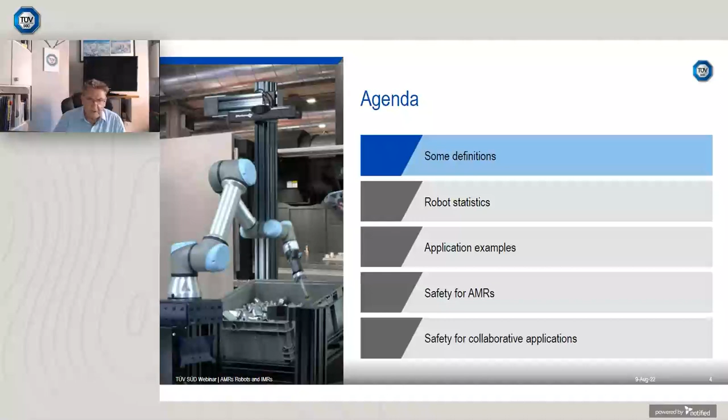So some definitions. An industrial robot, and we're talking about robots that are used in industry - our main topics today are all about robots used in industry. We're not talking particularly about medical robots, service robots, and so on. So an industrial robot is quite simply a reprogrammable multi-purpose manipulator that has three or more axes. And they come in all sorts of different shapes and sizes, and are used in a huge variety of applications. So it's difficult to be too specific about the whole variety of applications we have. But what is of growing importance and growing relevance is the use of robots in a collaborative application.

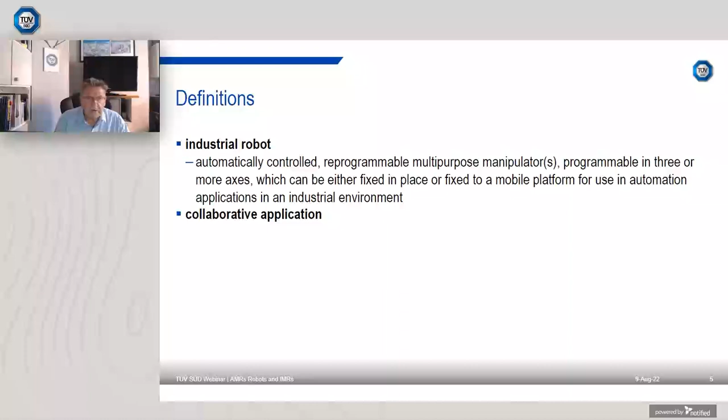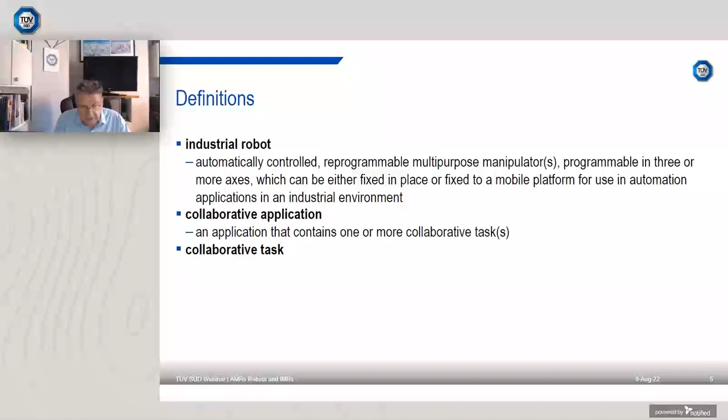So a collaborative application is defined as an application that contains one or more collaborative tasks. So a blindingly obvious definition, I guess. So the key to it is a collaborative task. And a collaborative task is a task that involves the use of a robot, but a task where a robot and an operator are within the same safeguarded space. So working without physical separation between the robot and people.

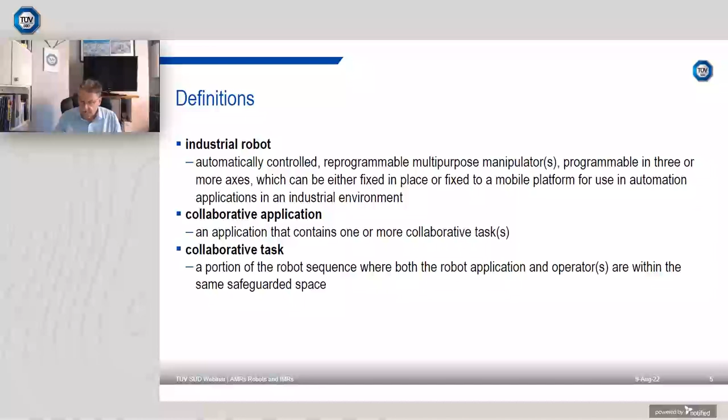Traditionally, of course, industrial robots have been used where they would be enclosed in physical guarding, very often called robot cells. The robots would be only accessible by people entering the danger zone, the zone where the robots are, by monitored movable guards or some other measures like that. Collaborative applications are where we're going to acknowledge that there will be people and robots in the same zone, so they could come in contact with each other. So that's the important thing.

AGVs and AMRs and IMRs - the terms are used slightly differently in some cases. We shall look a little later at a North American standard that has tried to put some fairly precise definitions on the use of these abbreviated terms. But in essence, an AGV is an automated guided vehicle that follows fixed routes. So they would typically be following a route mapped out and using inductive guides embedded in the floor or something of that nature. So they could work only along the tracks that they've been assigned to. And there is a place for those, of course. They've been used very successfully for many years, and there's still applications which suit that kind of approach.

But what we are seeing more and more, because of the increasing use of more advanced technologies, is mobile platforms, mobile vehicles that don't have to follow a fixed path, that can navigate by the use of various sensors and various technologies, so they can move around dynamically. In some cases, particularly if it's an outdoor application, they'll be using GPS systems or this kind of thing to map their routes, but they're working autonomously. So those kind of platforms are more likely to be described as an AMR, an autonomous mobile robot. And safety has to be assured, of course, so we'll look particularly about what sort of technologies are used to ensure that the AMRs can be deployed safely.

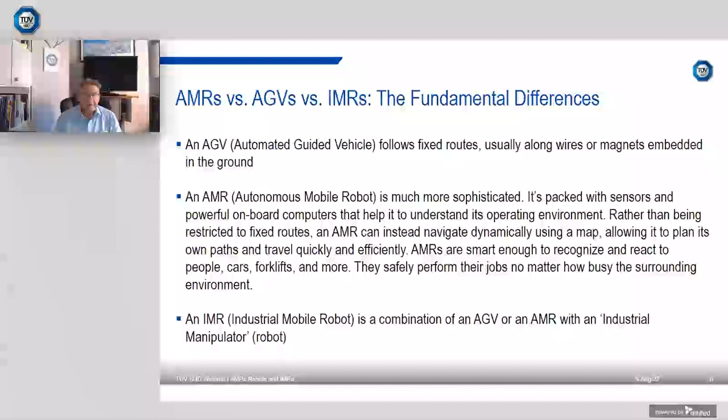Robots have been around now for a very, very long time, 50 years or more, since the first robots that could truly have been described as industrial robots were used, primarily in the automotive sector, but their growth has been relatively consistent.

In the early years, the use grew quite rapidly until there was an incident in a painting application in an automotive manufacturing plant in Dearborn in the USA, where the robots decided to go a little bit crazy, if I could use that expression. Some windows got broken, some physical damage was done because of this random operation, and it set back the deployment of industrial robots for a few years.

But then the technologies, the control technologies, improved. The chances of those sort of things happening again were lessened, of course. So they've started to be in wider and wider use.

This slide on the screen now is from a report from the International Federation of Robotics, and they produce a report that looks at the deployment of robots throughout the world. We can see that from the years 2009 up to 2018, there was steady growth.

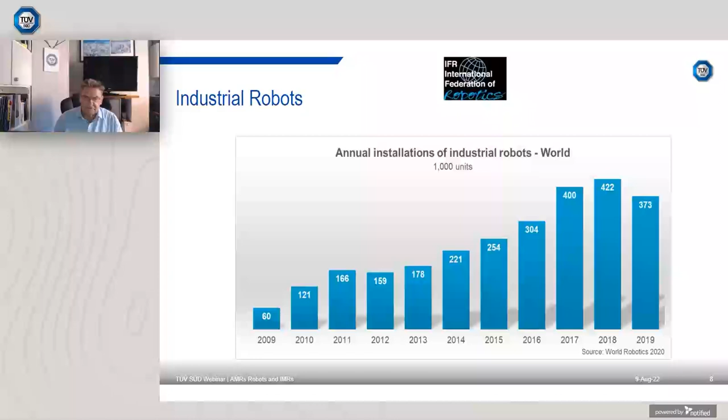It was knocked back, of course, because of the pandemic, which knocked everything back. So 2019 saw a drop in the annual installations, but we see that there was clear and steady growth for the years before that, and that growth is expected to return.

This graph shows us the percentage of installations according to the three key regions: Asia and Australia combined, Europe, and America. I'm not sure how much Australia counts for in the blue bars on this graph, but I suspect it's a relatively minimal amount. So I think what this shows us beyond any doubt is that the key growth areas are in the Asian market, where we're seeing the greater density of robot installations and the greater take-up of various technologies.

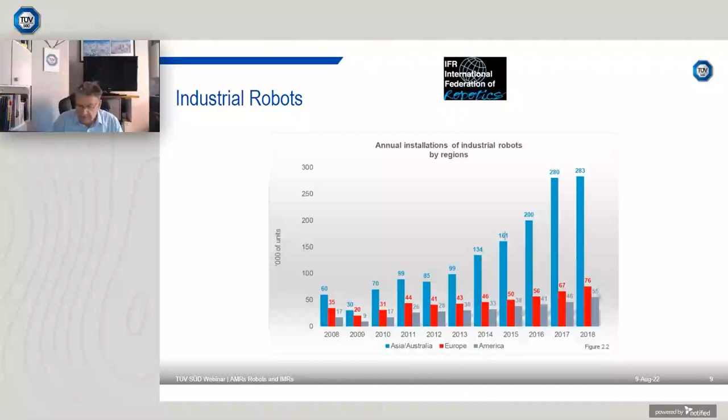USA is showing as less density than Europe, which some may find a little surprising, given that historically the USA has been at the forefront of these things. So it's Asia - Asia are the key areas where we're seeing the greatest growth.

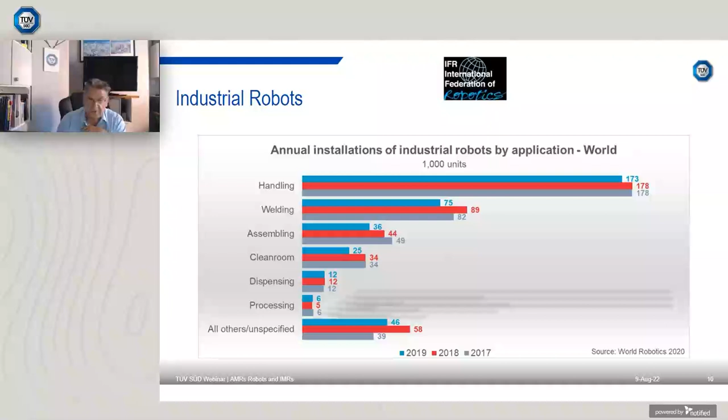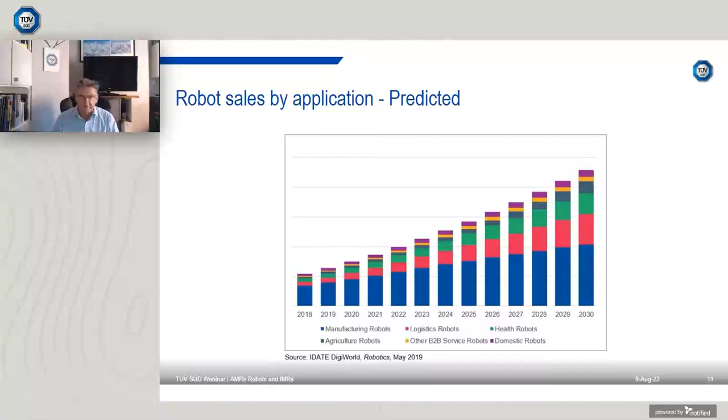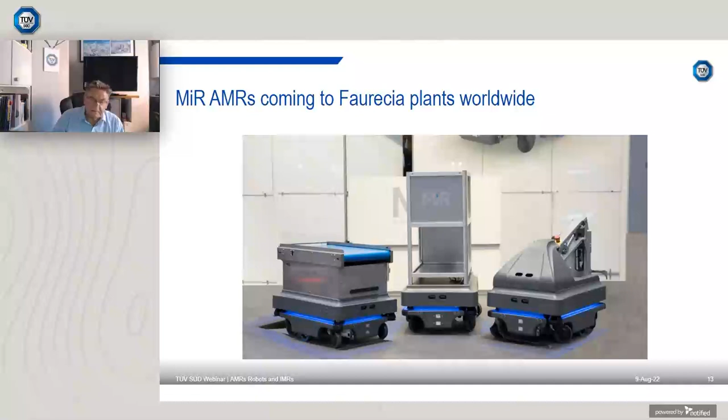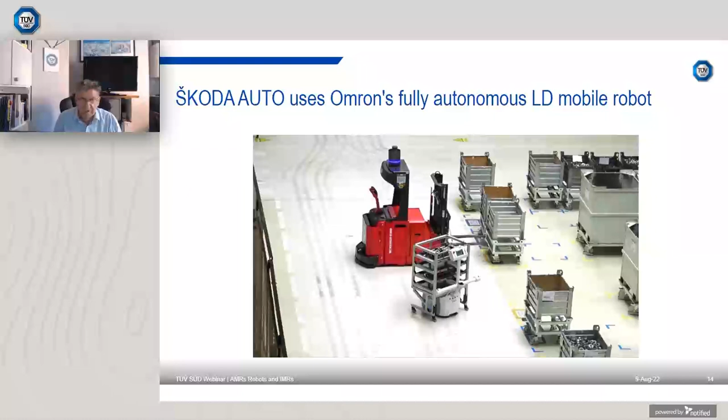Another clip from a press release about Skoda, and they're using Omron's logistics robots. So in the center of the screen there, we can see a robot manipulator, an AMR, autonomous mobile robot, carrying parts from machine section to machine section. But above that, there is a combination of a manually operated forklift truck that has been also equipped for autonomous operation. So it can function both as a traditional manually driven device, or it can be operated autonomously. So combinations of manual and autonomous operation.

I guess it won't be a surprise to anyone to know that a very large user of AMRs is Amazon. Amazon have got a very, very active division, more than a department, I think, operating in various parts of the world for deployment of advanced robotics technologies, and understandably, a big part of that is their AMRs that move those product storage racks around the warehouse floor.

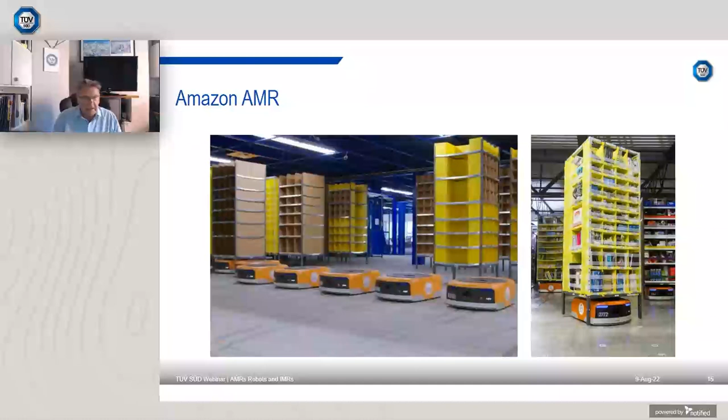And you can see from the picture on the right there that those racks are very, very tall. They can be quite weighty, very, very heavy, and the AMRs have to operate very, very smoothly. Otherwise, there would be the danger of them toppling over and so on. So the basic warehouse floor structure becomes also critically important to make sure that they have a smooth operating plane. So those are some examples of the deployment of AMRs.

AGVs, AMRs, they are growing in use exponentially, and they're extremely effective at the sort of things they need to take the humans out of the picture, make sure that these relatively simple tasks of moving product from one position to another are done with autonomous mobile robots.

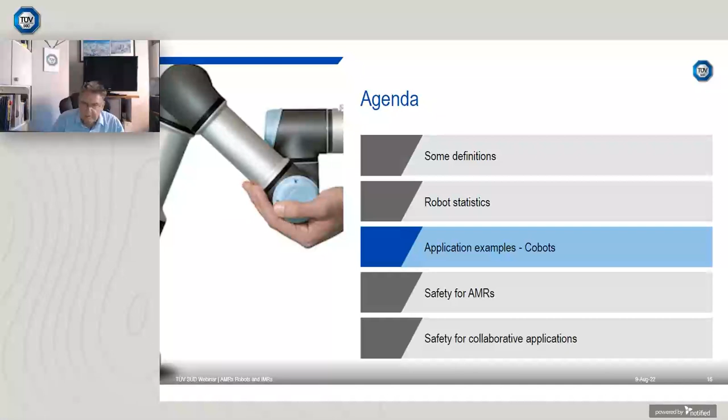Another area which is again of growing importance, we're seeing more and more deployment, is in what are generally simply referred to as cobots, an abbreviation of collaborative robots. My personal preference is that we emphasize the fact that these are robots being used in collaborative applications, and not all applications, we'll revisit this in a few minutes again, but not all applications that are developed using these so-called cobots are suitable for collaborative working.

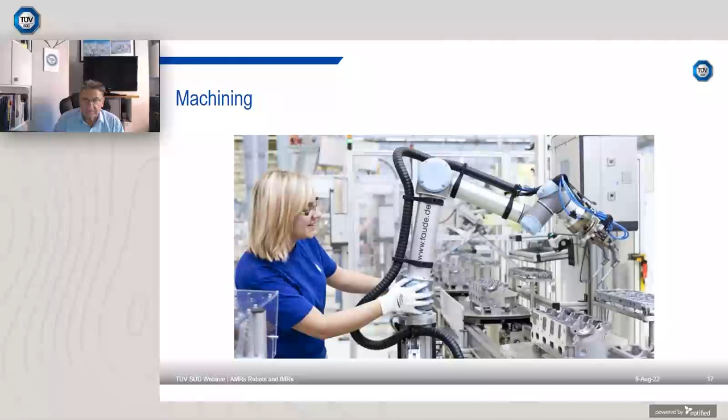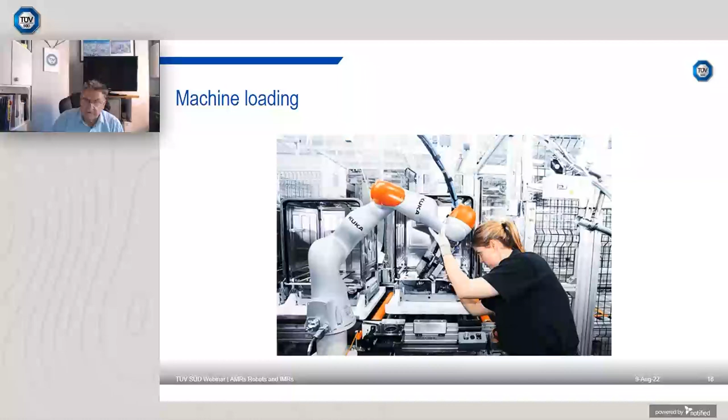Machine loading is again a huge area where we have collaborative operations, collaborative tasks between robots and humans, machine tending, machine loading. It's a dull, repetitive task where the human can be replaced by a robot. And I think it was, as far as I can recall, one of the original promoted areas for collaborative applications.

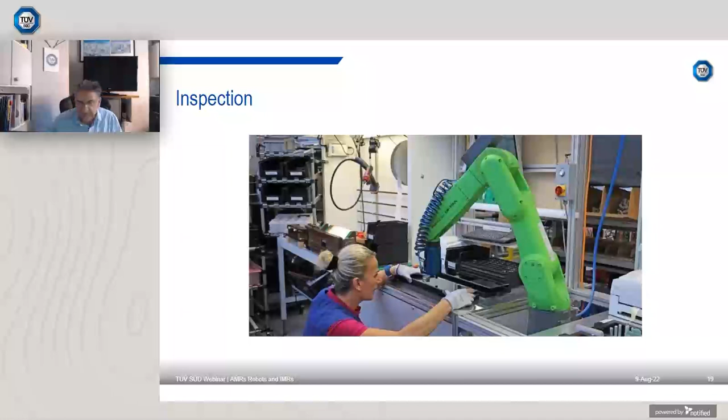And those applications we've just seen are clearly industrial applications, and that's where we're seeing the huge growth, huge deployment. But robots that are designed for collaborative applications don't always get used in industrial settings. In fact, this is an example of the use of a pair of robot arms that are deployed as a robotic chef. And this is a real application.

This isn't made up. You could type robotic chef or Moley Robotics into a search engine and see videos of this in operation. It can reproduce meals for you. It comes as part of a robotic kitchen, and it's a very novel application.

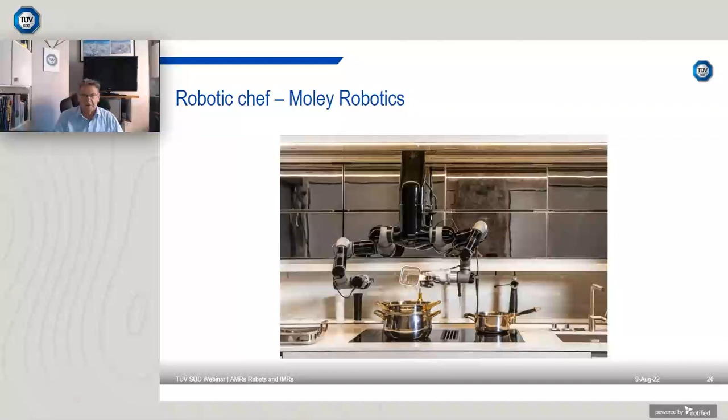It is, despite the looks of it, with all the stylized bits on it, a pair of Universal Robots arms configured to replicate the actions of a chef. Lots of safety features built into that, I have to say, but that's an example of an application using these typical industrial style robots, but in a non-industrial environment.

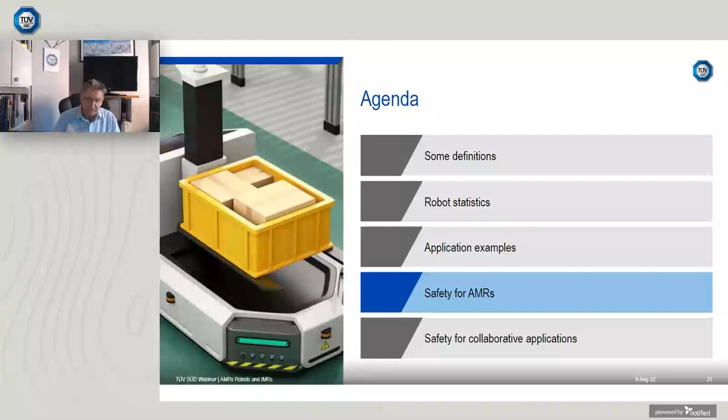So it is, of course, extremely important that we ensure that people working in and around these AMRs, IMRs, collaborative applications, and so on, are protected from the possibility of harm, protected so that they are not going to be exposed to an unacceptable level of harm. And in an AMR, that's done by combinations of sensors.

And this is information taken from the MiR Mobile Industrial Robots company about their systems, and I guess their primary level of protection is using area scanners, laser scanners, active optoelectronic protection devices that are two-dimensional devices that can scan a field, and they're programmed to scan various areas around them. They typically have a 270-degree area that they can scan.

So they would be deployed perhaps on two corners of an AMR, and between a combination, you've got 360-degree coverage covering all sides of the device, and they're programmed so that if there's an obstacle in the path, it will be detected by the scanner, and action can be taken by the AMR; of course, it's simply a stop, but they could also have onboard systems that would allow them perhaps to dynamically change the path so they can go around the obstacle.

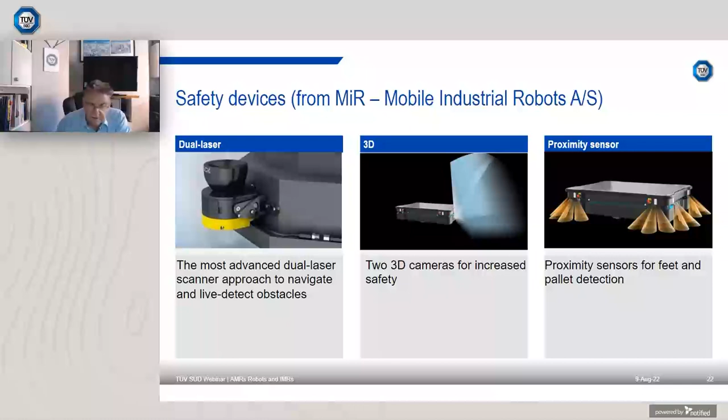An adequate level of protection generally means that to conform to the international standards for robotics, the safety related parts have to meet a clearly defined performance level with a defined architecture. And the two standards are stated within the robot standard. The robot standard, by the way, is ISO 10218, which is in two parts. 10218 Part 1 is for robot manufacturers, 10218 Part 2 for the applications of robots, integration of robots.

And those standards require that the safety related parts, if we're looking at the requirements of the functional safety standard ISO 13849, which is being referenced on the table on the screen now, have to meet performance level D with category 3 architecture. The other standard we'll see in a few minutes is an IEC standard called 62061. So you can see that, again, this is information from MiR.

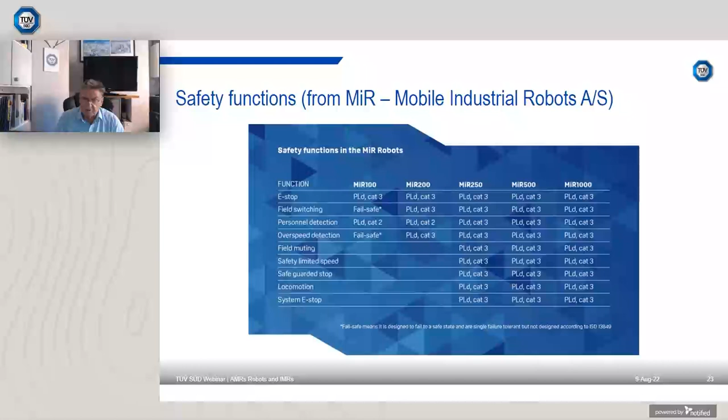With the exception of their very small, low-risk devices, all of the safety functions on their larger platforms are designed to meet the requirements specified in 10218. So they're all capable of performance level D, and they've achieved that by the use of category 3 architecture. A little bit more about that in just a few minutes' time.

But some of the technologies are used in combinations. As we saw, on an AMR, we perhaps have a combination of two-dimensional laser scanners being used with 3D camera technologies and so on. And these things need to be combined in a way that ensures that we're meeting the requirements for risk reduction provided by the control functions.

A laser scanner, also called AOPDDR, is an established technology. They've been around for a long, long time. They're well understood. They're used in lots and lots of different applications, not just in mobile or autonomous applications. They're used in fixed installations and so on.

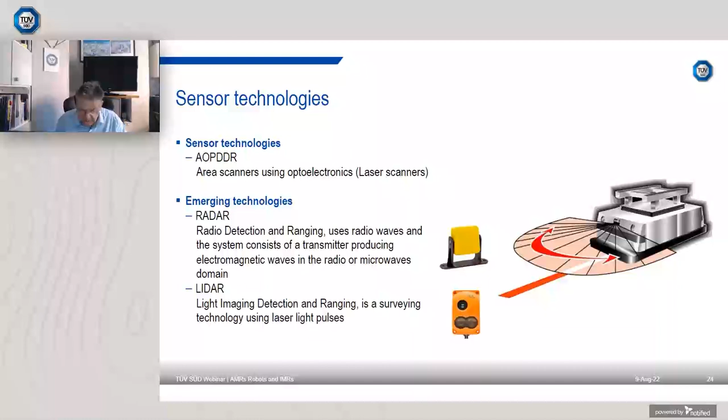But there is an increasing use of emerging technologies in the field, where things like radar and LiDAR are making a contribution to the overall safety. So not just relying on traditional approaches, but using combinations of different sensors. And that has led to the development of specific publications from standards bodies to try and give some clear guidance about how to combine these technologies.

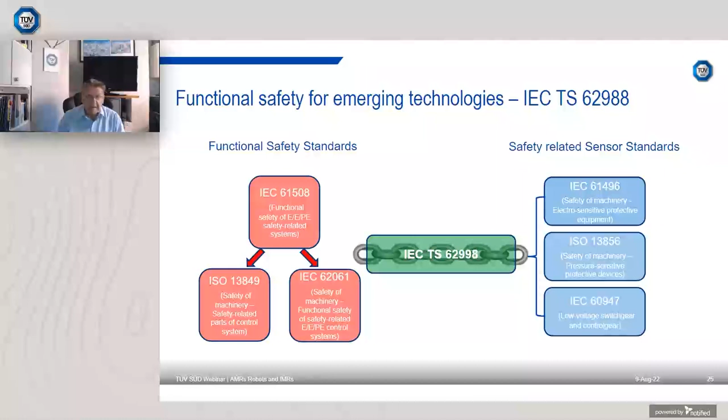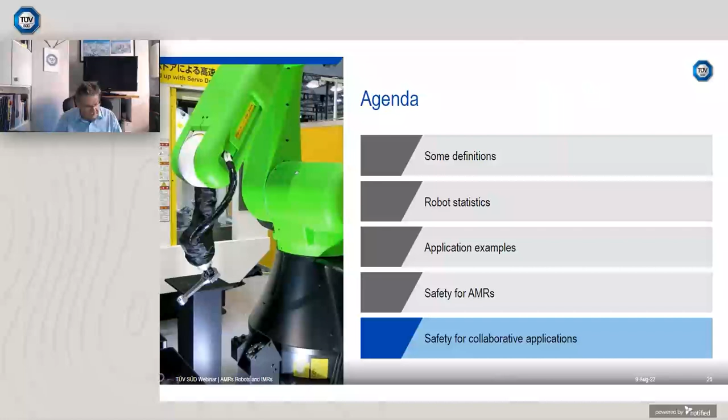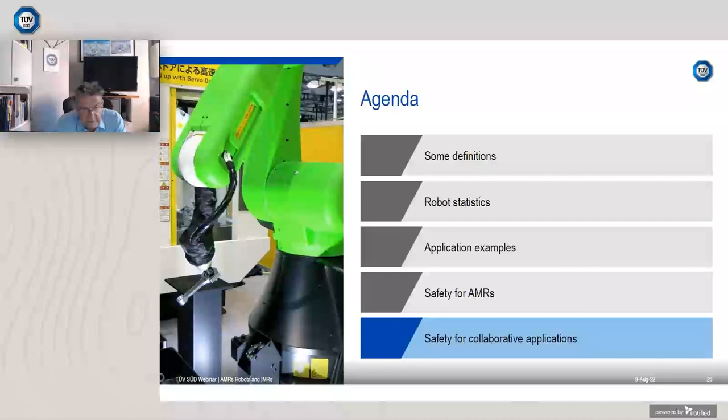For collaborative applications, again, this is covered in 10218. 10218 has got specific requirements about collaborative applications, and it describes 4 separate types of collaborative application, where the first one is called a safety-rated monitored stop. We'll see a little bit more detail about these 4 immediately following this slide. The second is using something called hand guiding. The third method is speed and separation monitoring, which has got some correspondence to the first method. And the fourth method is power and force limiting.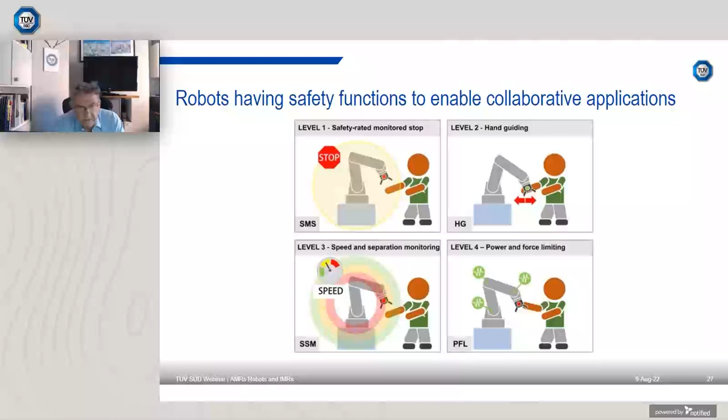And of these 4 methods, I think the one that is most likely to be looked at in practice is power and force limiting. So just briefly a word about these 4 separate methods that are used in collaborative applications.

That principle has been well established and has been used in applications where the robot itself wasn't necessarily designed for collaborative application, because in that, although it's an unprotected workspace from a physical point of view, we can't have people and the robot in the same area at the same time whilst the robot is capable of moving.

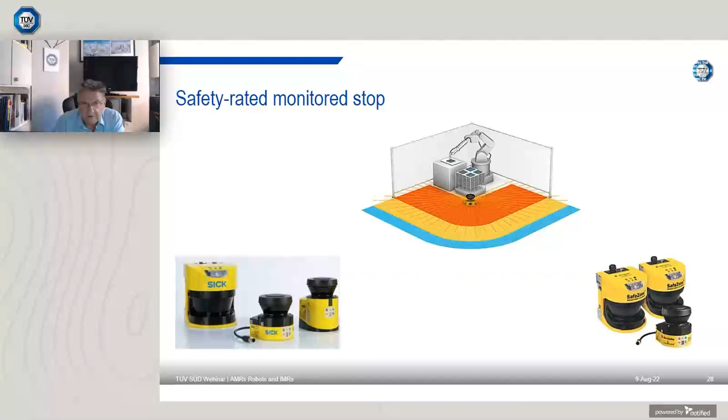And whilst that's happening, there have to be other measures in place. The robot would only be allowed to move with a safe limited speed. There has to be an enabling device. An enabling device is sometimes called a dead man's handle. It's typically a handheld device that has to be held in a mid position. So if you release it, the enable is removed. If you grip it tightly, the enable is removed, that type of thing. And once the enable is removed, the robot has to stop.

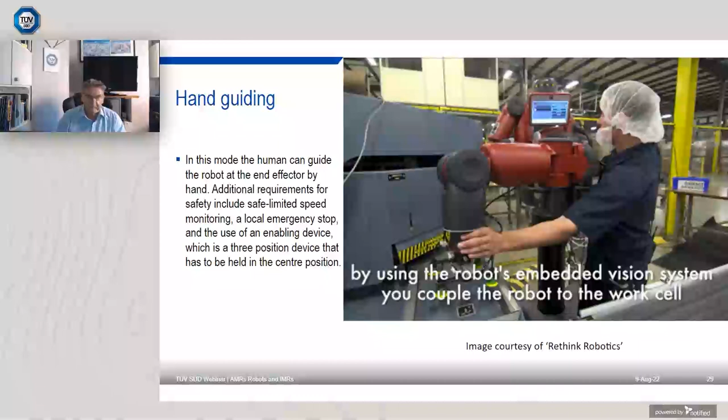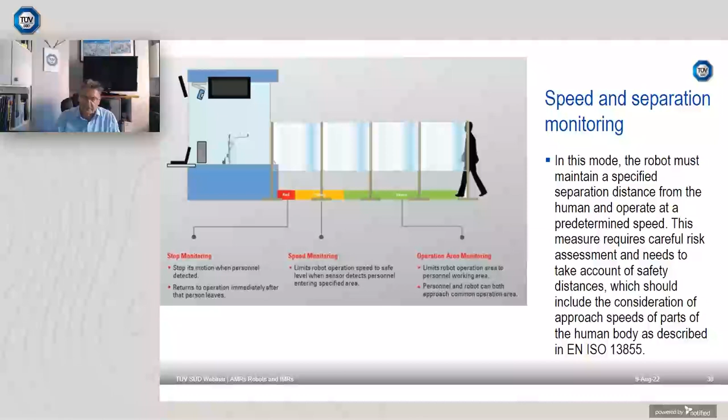The third application is a sort of combination of separation monitoring and safety rated stop monitoring, where, again, area scanners are typically used to provide this particular kind of protective arrangement, where if someone is getting closer to the robot, going into the orange zone, the yellow zone, as we can see on this slide now, the robot will reduce its speed, perhaps give a warning, and then if you get too close, it will go to a stop condition. So it's got quite a lot in common with the first method, safety rated monitored stop.

But the fourth method is arguably the most common and comes with perhaps the most concerns, which is power and force limiting. So in this method, it is acknowledged that robots will be operating normally whilst people are in the collaborative workspace. So it is acknowledged that there is a possibility, quite a strong possibility, I dare say, that the person and the robot will come together at some point during the operating cycle, whilst the robot is operating.

So what's needed here is to say that if that happens, or perhaps more correctly when that happens, the power and force delivered through the robot, including its end effectors, the tooling that's mounted on the robot, has to be sufficiently controlled to ensure that an unacceptable level of pain isn't inflicted on the person. So this brings about a concept which creates a reasonable amount of concern, that we're saying, okay, we're going to accept that a person can come into contact with a moving part, can be subject to direct contact, can have some force from the moving part before the moving part needs to stop.

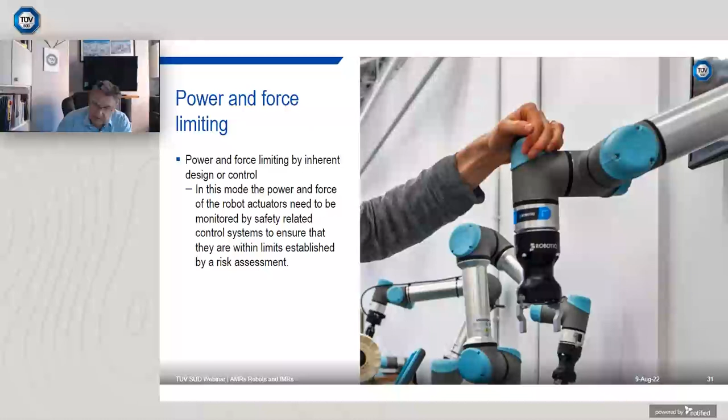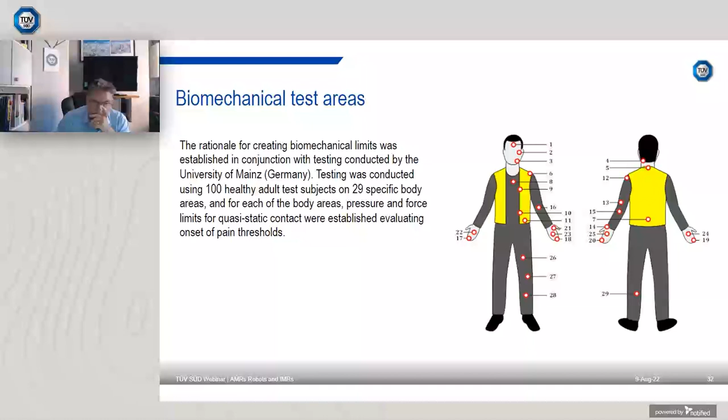So this needs very, very careful setting up, very careful consideration, and ensuring that these targets are being met does need specialized equipment, and people have to be trained, obviously, and competent in the use of that specialized equipment.

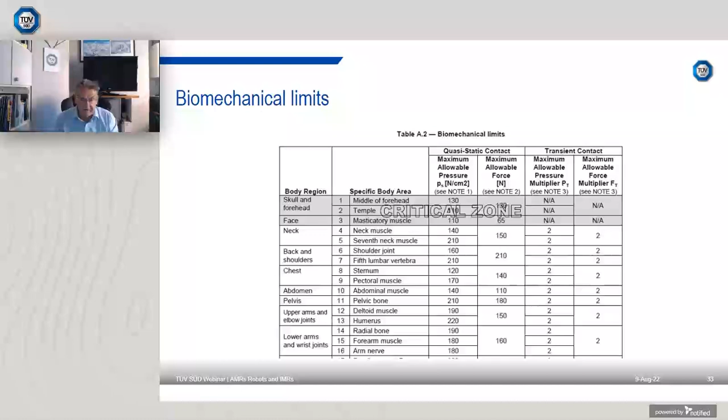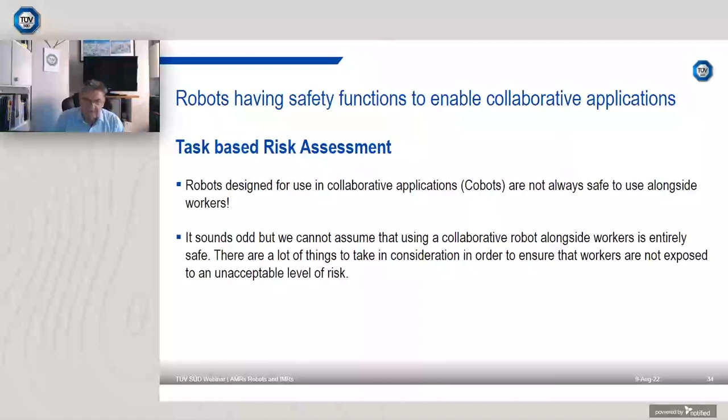And what this means is that we have to work on the assumption that even if something is called a cobot, it's designed to be used in collaborative applications, it doesn't mean it's automatically safe to use alongside workers. We still have to ensure, we must ensure that people aren't exposed to an unacceptable level of risk. So a robust risk assessment is vital.

And I'm sure a lot of you listening, if not all of you listening, will have seen the news last week where in a robotics chess game, the human opponent had injured their finger. I think it's been described as a broken finger. I'm not quite sure of the true details of this, but a cobot being deployed as a chess player actually grabbed the finger of their opponent.

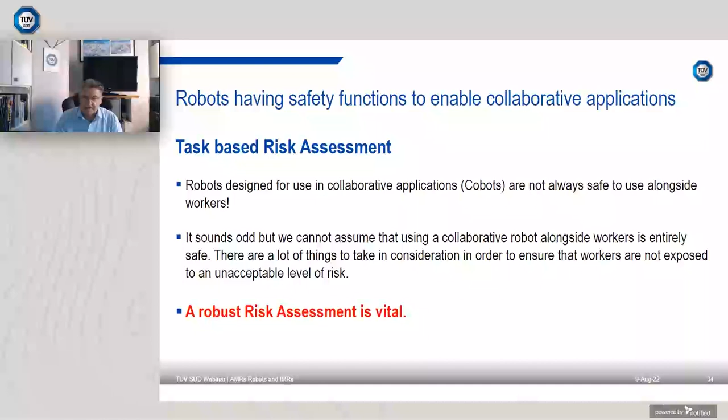And I think what is clear out of that is that a robust risk assessment had not been carried out here, that the end effector, the grippers were not designed suitable for the potential that they could grab somebody's finger. The power and force exerted was not limited, and so on. So I think the key thing that went wrong here is that the guidance about task-based risk assessment and necessary measures wasn't correctly employed.

So a few moments ago I mentioned that the safety-related controls for all of these things, for the 4 ways of protecting collaborative applications and for all other aspects, autonomous mobile robots and so on, need to meet.

Sorry, my screen has just changed for some reason. I know. Okay. I don't know. I'm sorry. I'm dithering here because it seems to me as though the attendees are no longer seeing my slides. They've come back. Perhaps that was a transition.

I don't know. Anyway, the 10218 describes, currently, this standard is due for change. It's overdue for change, I might say. So some of these aspects might be slightly different in the next version of the standard. But I mentioned briefly a little while ago that the safety-related parts have to meet performance level D with category 3 architecture if we're working with 13849, or SIL 2, safety integrity level 2 with hardware fault tolerance 1 if we're using the IEC standard, the IEC 62061.

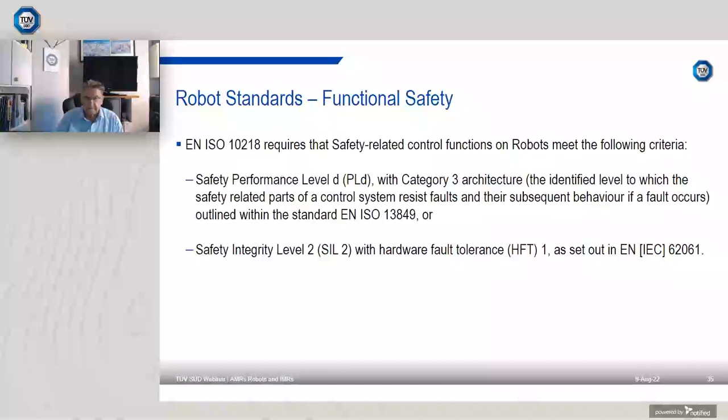The American standard I referred to right at the beginning was developed by the Robotic Industries Association, which have now changed their name to A3 or something, in conjunction with ANSI, the American National Standards body, and they produced a standard, part of their R15 series, R15.08. It's a little more than 18 months old now.

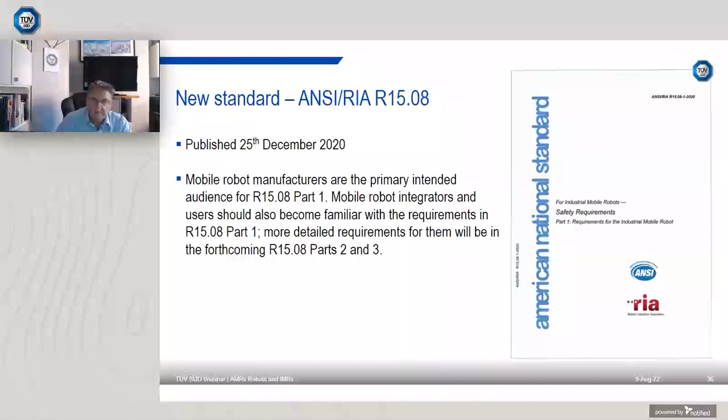But this standard was set out to fill a gap where the traditional standards for AGVs, for driverless trucks, wasn't really up to date with the growing deployment of AMRs and IMRs. So in this standard, that's where they came up with these definitions of IMRs as 3 different types, type A, B, and C, where an IMR type A is an autonomous mobile robot. That's the mobile platform only, something that moves racks around, moves fixtures around, and so on, as we saw in an example earlier.

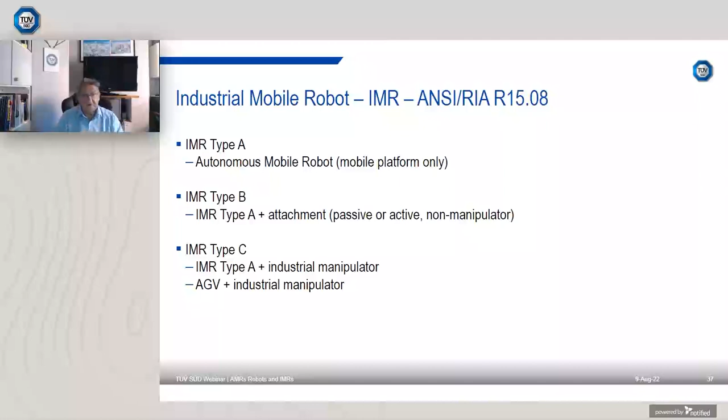The standard does give us some clear guidance about how we can make the choice. These flowcharts summarize the way we would go about checking whether we should consider something to be a type A, type B, or type C. It had been intended, or maybe still is intended, that this will also be the basis of a new ISO standard, a truly international standard. But I'm not sure exactly where that work is.

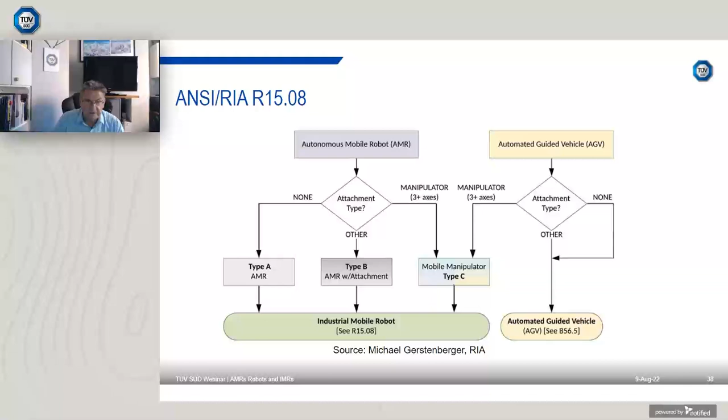But if we're looking at deployment of these things, this particular publication, R15.08, does give us some very helpful guidance. And that really brings me to the end of the topics.

And there is exponential growth in technology, going with smart manufacturing, whether we call it smart manufacturing, Industry 4.0 or whatever. We are seeing much more of it, and strong arguments say that we get a good return on investment by using robotics, more flexibility in our production layouts, smaller carbon footprints, and so on.